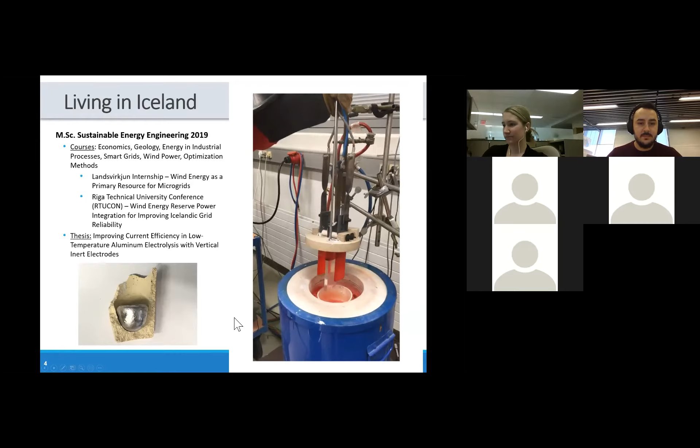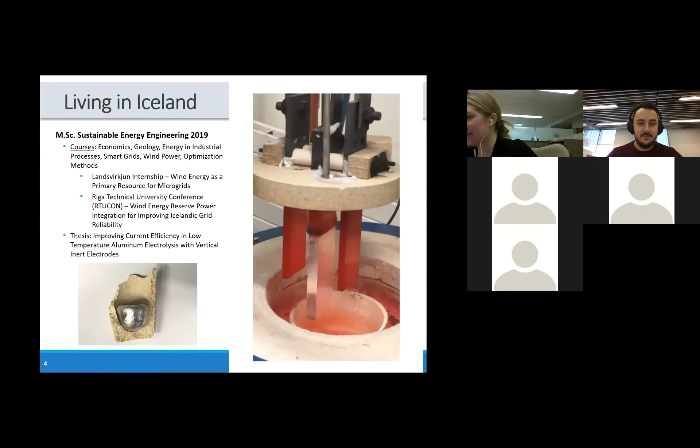So I have a video, let's see if this works and plays. One second, let me turn the laser off. The volume's not really needed. So this is just from one of our experiments after we made the aluminum, taking the anodes and cathodes out of the system. You can see there's molten aluminum on that middle one.

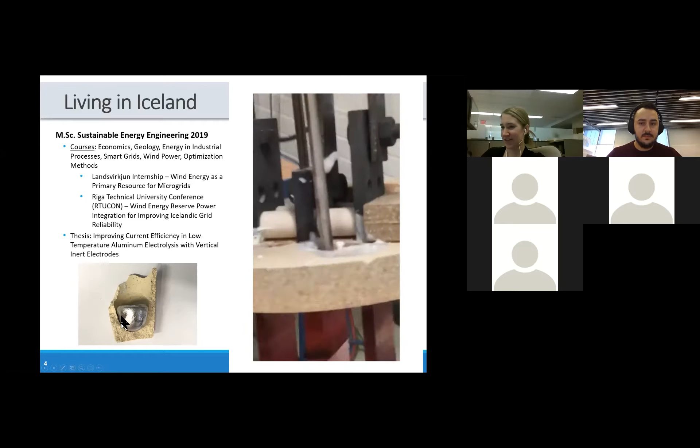And then I just also included a picture of our product. So this is a little nugget of aluminum.

So fortunately, while I was working on my thesis, I landed a job at Covanta, and it's very convenient that the corporate headquarters is about 25 minutes from where I grew up. So since the summer of 2019, I've been at Covanta.

We're a sustainable waste management company, and we provide sustainable waste and energy solutions to our clients to ensure no waste is ever wasted. So what does that mean? There's always some value within a product at the end of its lifetime, so we want to make sure that it's utilized to its fullest potential. We have helped clients minimize their environmental footprint and maximize their value. Our clients range from residential areas, commercial, working with different companies, as well as federally, working with the government, to help them reach their sustainability goals.

So our core business is our waste to energy facilities. We also use the term energy from waste, so I might use them interchangeably throughout the presentation. We have a subsidiary business called Covanta Environmental Solutions.

Is there anything? Oh, sorry, Lori. No, my camera's okay. Surprisingly, the light hasn't gone out yet.

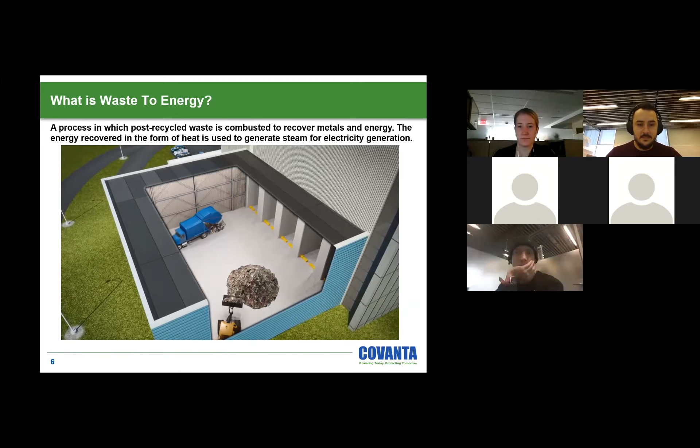The waste is unloaded onto the tipping floor and visually inspected for any unacceptable items, which are removed for separate recycling or proper disposal. Waste is then pushed into a storage pit and thoroughly mixed before being loaded into bins, which we call hoppers, where it travels to the combustion chamber. The tipping and waste storage areas are maintained under negative air pressure to contain dust and odors.

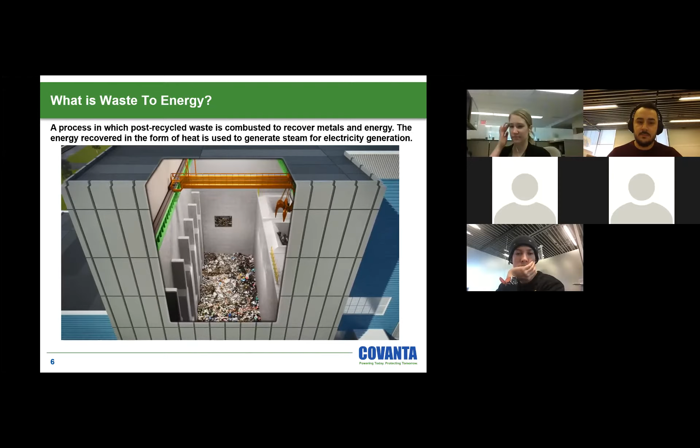Once fed into the combustion chamber, waste is combusted at extremely high temperatures in a self-sustaining process at approximately 2,000 degrees Fahrenheit. A typical hopper load is completely combusted in 1 to 2 hours.

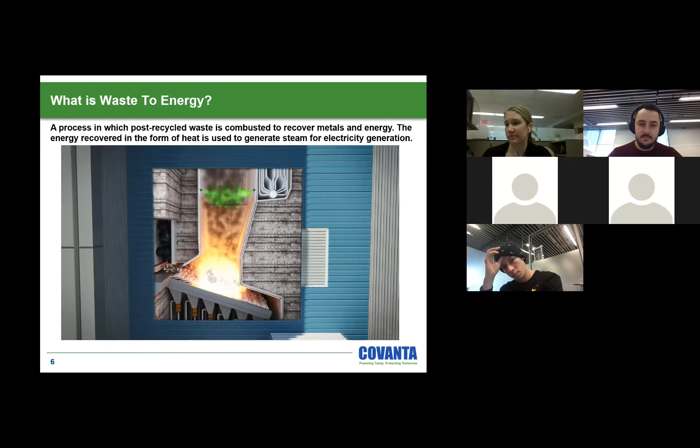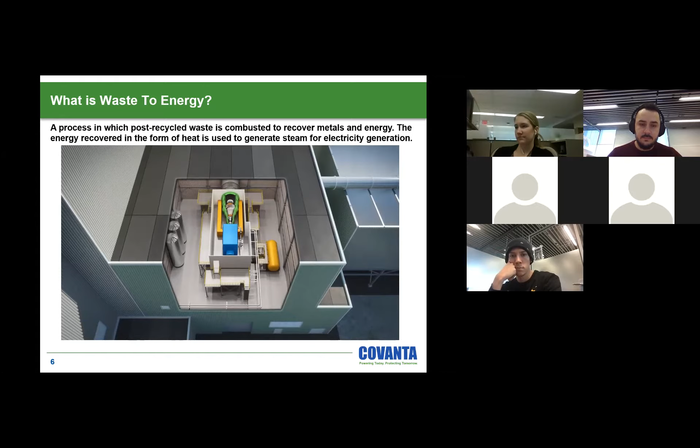As waste is burned, the heat converts water in the steel tube-lined walls into steam that rises through boiler tubes where it is superheated. The steam turns a turbine-driven generator to produce electricity, or may sometimes be used directly for heating or industrial processes. The electricity produced by the turbine generator is exported to local utilities for use in homes and businesses.

Each ton of waste can generate 550 to 700 kilowatt hours of electricity. Steam from the process is condensed back into water and returned to the boiler tubes, making it an efficient, closed-loop system. After combustion, the volume of waste is reduced by 90%, leaving an inert ash and metal.

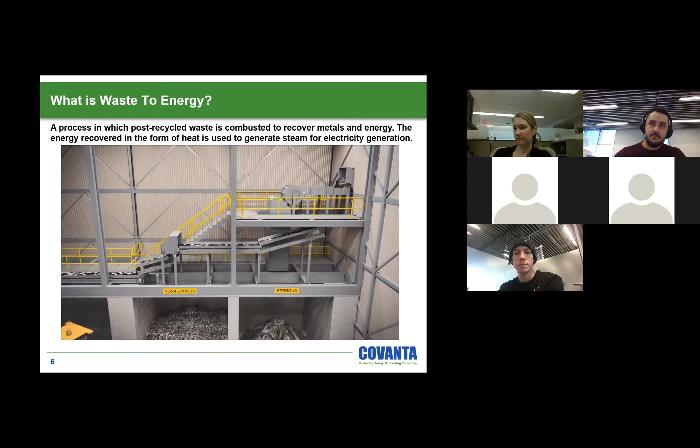Remaining ash is beneficially reused or landfilled as non-hazardous waste. Ferrous metals such as iron and steel are recovered using a rotating drum magnet, and non-ferrous metals like aluminum and copper are separated by an eddy current system. Collected metal is sold to be made into new products.

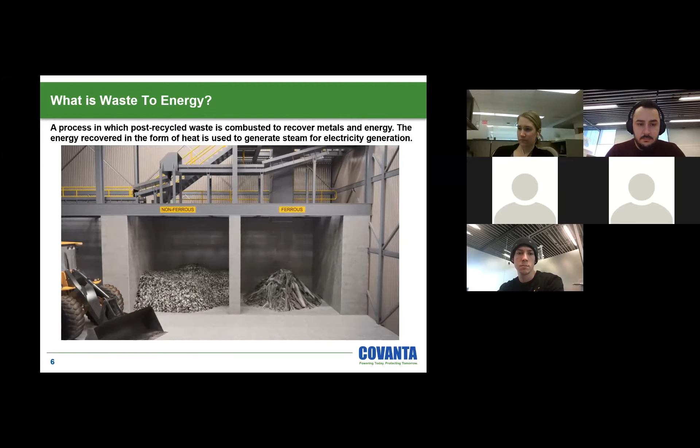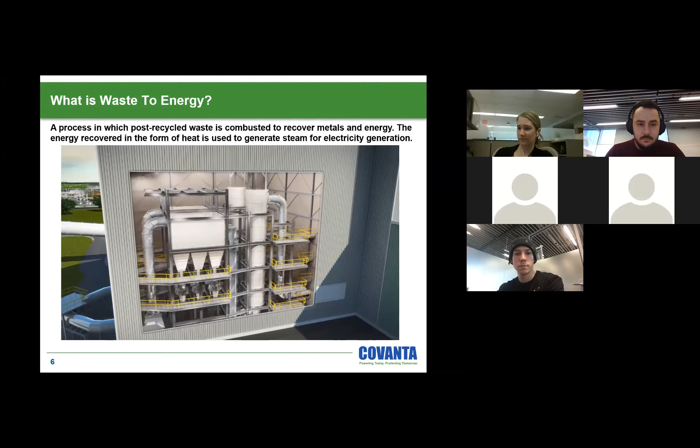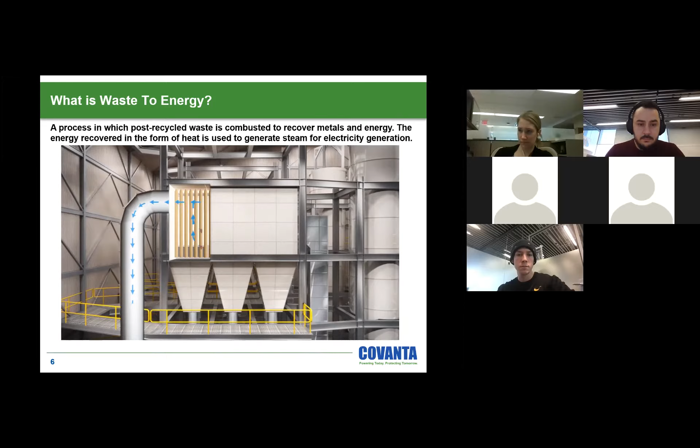State-of-the-art air pollution control equipment ensures that emissions are well below limits to be fully protective of human health and the environment. We neutralize acid gases using lime in a scrubber reactor and inject activated carbon for heavy metal control. We control emissions of particulate matter primarily through a bag house, which employs thousands of fabric filter bags. All flue gas must pass through the bags before exiting through the stack.

Throughout this process, the control room closely monitors emissions through a real-time continuous emission monitoring system, controls steam flow, and a number of other automated systems inside the facility.

Covanta is committed to providing sustainable waste and energy solutions to ensure no waste is ever wasted. At Covanta, we believe the materials discarded every day should be utilized to their fullest potential to preserve the world's valuable resources and generate clean energy for our communities and the world we live in. This is how Covanta is powering today and protecting tomorrow.

All right, so that's it. That's the end of the presentation. No, I'm just kidding. But the video was a little bit long, but I thought it was a very good overview of what we do at Covanta.

So now you may be thinking, where does energy recovery fit in waste management? Both the US EPA and the EU have a designated waste hierarchy which displays materials management, placed in order of descending environmental impact. Preventing waste, not even creating it in the first place, has the smallest impact on our environment. This is followed by reducing, reusing, recycling, and composting.

Energy recovery is then the next most preferable option after recycling, with the largest impacts on the environment from landfilling. I wanted to stress that in order to get the maximum greenhouse gas benefit and reduce our impact on the environment, waste should be managed according to this hierarchy from top to bottom.

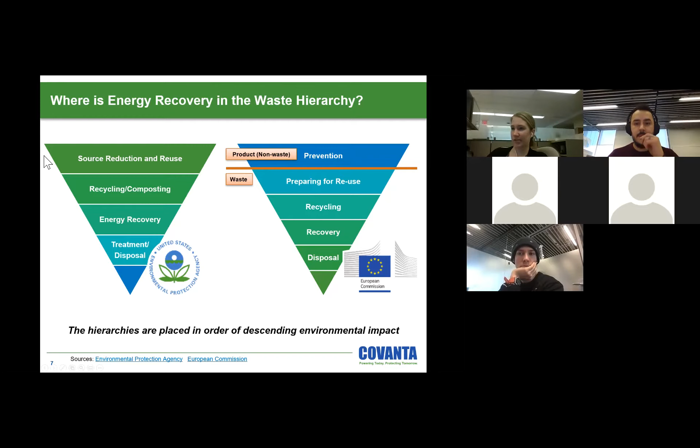So now that we know the best ways to manage our waste, how do different countries throughout the world compare? As you can see, the US is not doing a very good job at waste management, where we landfill nearly two-thirds of our waste. We're recycling about 30%, and energy from waste is about 7%. This is quite different from Europe, where they've enacted sustainable waste management policies, rules, and regulations for how to manage their waste.

You can see on the screen that Denmark and Germany are leading Europe, with Denmark's nearly 50% and Germany's over 50% recycling, and then the next is energy from waste. There's very little landfilling - instead they use energy recovery to extract value out of materials they can't recycle rather than landfilling.

I also wanted to include Canada, because Canada is very similar to the US, where there's a lot of land. You can see there's a similar breakdown with over two-thirds landfilling.

I also included Iceland, since obviously Reykjavik University is in Iceland and we've all lived there. You might be surprised to see it has a similar ratio, with almost two-thirds landfilling as well. It's interesting to note that 4% of the trash utilizes energy from waste, and this is because in 2019, Iceland started sending their trash to the Netherlands.

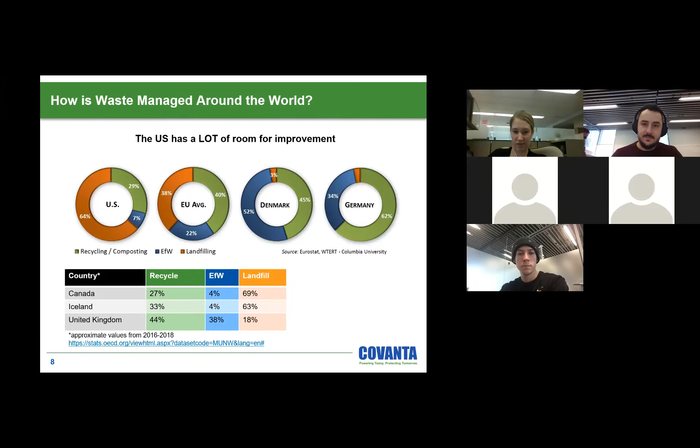We all know that reducing, reusing, and recycling helps minimize our environmental impact. But you might be asking, why waste to energy? Why utilize this compared to landfilling? Why is it better environmentally? First, using energy from waste instead of landfilling eliminates the production of methane, and methane is 84 times more potent than CO2 over a 20-year period. This is obviously particularly important given the current global push for combating climate change in a timely manner.

Also, there is leachate generated from the trash in the landfill - heavy metals can go through the water and get into the groundwater and contaminate it. It's not a very sustainable use of land, as it requires a lot of land. Energy generation from landfills is about 65 kilowatt hours per ton of waste.

So energy from waste facilities are able to recover much more energy than landfills, even those equipped with gas collection and energy recovery systems - about 9 times as much energy per ton of waste on average. And just a statistic: US landfills only capture about 50 to 70% of the landfill gas generated, so there's still a lot of methane being emitted into the air.

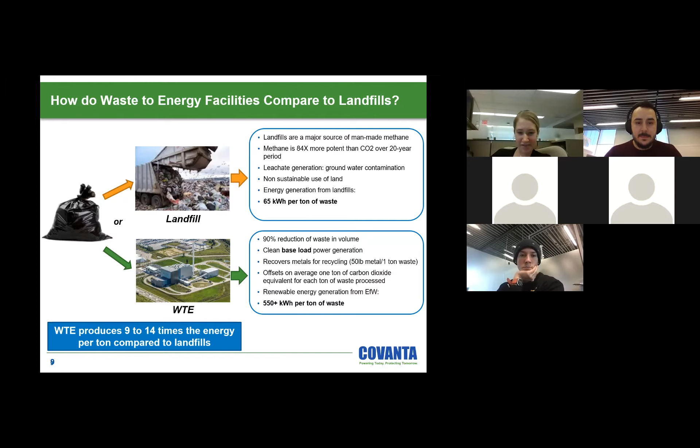Another benefit is that it's actually net negative in greenhouse gas emissions when looking at the ton of CO2 equivalent per ton of MSW diverted from the landfill. So by using energy from waste, we're saving a ton of CO2 equivalents from a life cycle approach.

So how is this possible? To recover energy, we have to combust the waste, and the combustion process emits CO2. However, we're reducing greenhouse gas emissions by avoiding the alternative of landfill and the methane it produces, as well as by providing baseload power that could have otherwise been generated from fossil fuels.

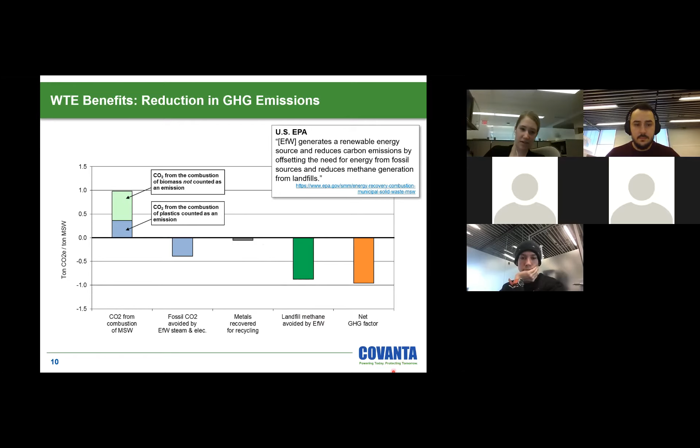Combining the two blue shaded bars cancels them out, and then the metals combine with the methane avoided by energy from waste, giving a net greenhouse gas savings of about a ton of CO2 per ton of MSW combusted.

So energy from waste is actually the only major source of electrical generation that is net carbon negative. In this chart, you can see the life cycle greenhouse gas emissions on the left-hand side in tons of CO2 equivalents per megawatt hour generated. Coal and natural gas are quite high, but energy from waste has a negative net carbon impact.

This is because it both manages waste and at the same time generates electricity while preventing methane emissions from landfills. Meanwhile, most of wind and solar's life cycle greenhouse gas emissions are due to upstream processes, for example mining the rare earth metals required to create solar panels.

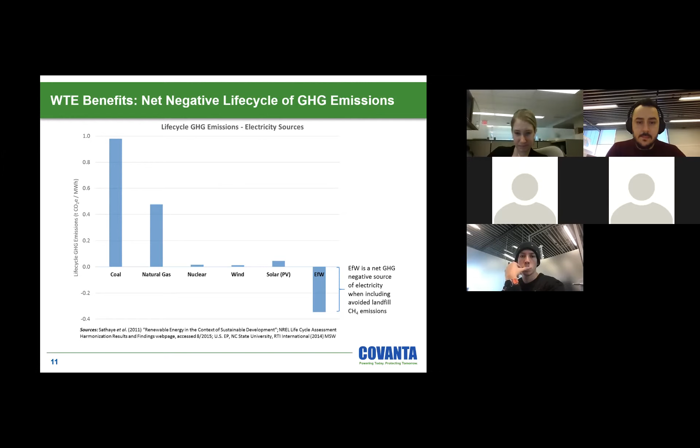Lastly, energy from waste can be beneficial in that it utilizes less land. On average, energy from waste facilities need less than an acre per megawatt, in contrast to landfills which are about 27 acres per megawatt, solar which requires 8, and wind which requires 18.

I know most of you are not in the US, so you're probably thinking, what the heck's an acre? So I also put it in meters squared and kilometers squared. For reference, Klambratun is about 30 acres, which is about the size of a landfill, and a football field is about 1.76 acres - so less than half a football field is required for land use for energy from waste facilities.

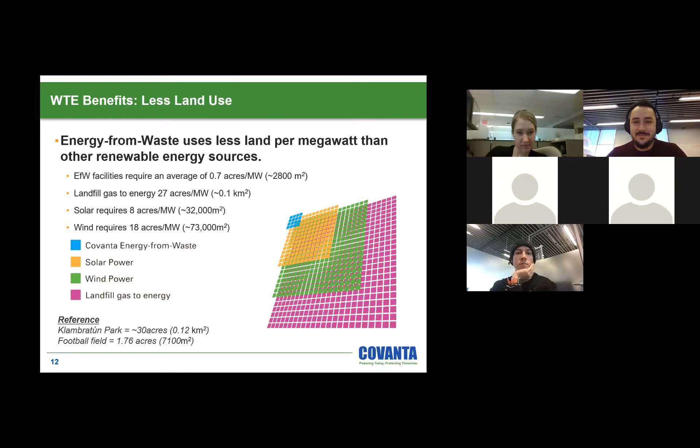So now we've got an introduction to waste energy, and now I'm gonna talk to you about Covanta. Covanta is a world leader in waste to energy, operating over 40 facilities in North America and Europe. We make up about 70% of the US market, and annually we process about 21 million tons of waste.

The waste is processed generating 10 million megawatt hours, which is enough to power over 1 million homes. Through our metals recovery, we recycle over 600,000 tons of metal, and that's equivalent to about 6 Golden Gate bridges.

We provide employment to nearly 4,000 people in North America, and we have our high focus on sustainability and encouraging a circular economy.

We have a subsidiary business called Covanta Environmental Solutions, and it helps more than 3,500 customers across North America identify opportunities to minimize their waste and find beneficial reuse for their materials that would otherwise be thrown away.

For example, in the bullets you can see we help with total waste and materials management. We help with liquid waste management. For example, we can treat wastewater to be beneficially reused.

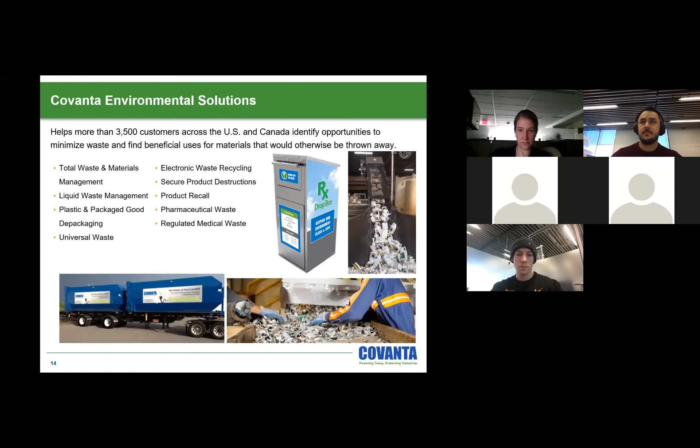I just wanted to give you an overview of our Covanta facilities in North America. You can see that we're concentrated a lot in the Northeast, and this is attractive because densely populated areas have limited access to alternative disposal like landfilling in more metropolitan areas. So they have to weigh the cost advantage versus long hauling the trash to landfills.

So you see even like in Europe, since there's less land, it's more densely populated, that energy from waste facilities are advantageous because the trash isn't being transported that far and the energy is being recovered for electricity generation and metals recycling.

So this is our North America map. And then we have also started working in the United Kingdom, as well as we have a facility in Ireland. So the UK is committing to more sustainable waste management by diverting their trash from landfills to energy recovery and recycling. We're proud to be partnering with them as they go through this transition.

So I just wanted to point out, Dublin is already operational. They can take in 600,000 metric tons per year and produce up to 60 megawatts. And then I also pointed out our Rookery facility because in my role, I'm working with them as they're onboarding and getting their pre-compliance for pre-commissioning.

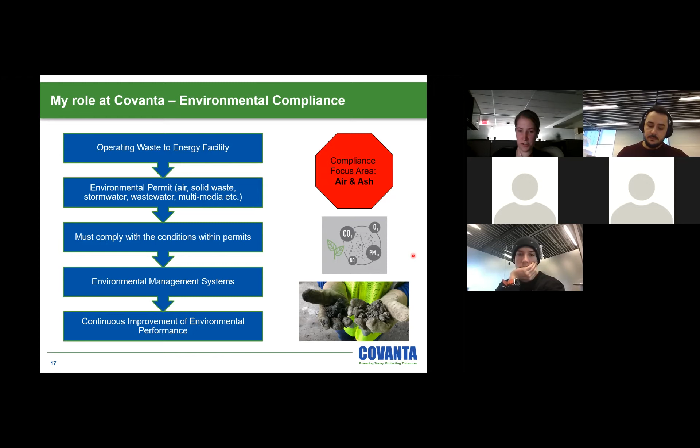So our main compliance focus areas are on air and ash, and I'll be going through that on the next few slides. In terms of air compliance, we have a bunch of control technologies in place. First, we have a sophisticated boiler design that ensures complete combustion of the waste, taking into consideration time, temperature, and turbulence. We maximize our combustion in order to minimize, for example, incomplete combustion where carbon monoxide is generated.

We also utilize selective non-catalytic reduction systems, or SNCR, for NOx control, injecting ammonia or urea into the furnace to convert the NOx into harmless nitrogen gas. We have activated carbon injection systems, which are added to the flue gas to allow, for example, mercury and dioxins to adsorb to the surface, and then they're removed downstream in our baghouse.

We also have our scrubbers that neutralize any acid gases through a spray lime slurry system. The acid gas reacts with the lime to form salts, which dry and leave a salt residue that's removed downstream through our baghouse. After treatment, the gas goes through this baghouse, which acts like a vacuum cleaner with a filter bag that traps particulate matter and the lime and fly ash on the bag surface. These bags are periodically cleaned to remove the ash and metals at the bottom of the baghouse.

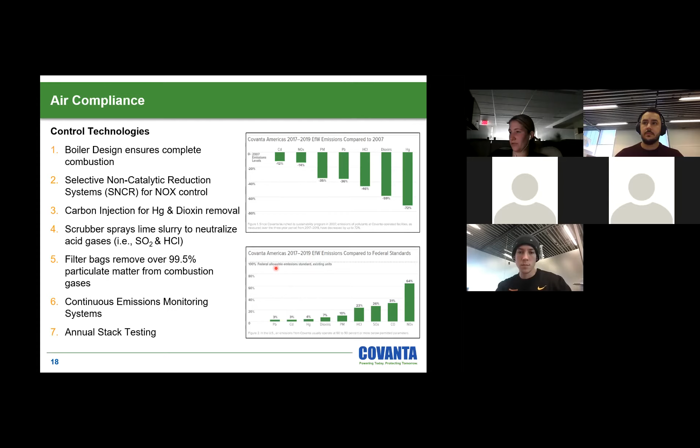I just wanted to show you real quickly, we started a sustainability program, I believe, in 2007, and since then you can see a reduction in our emissions. This is comparing 2017 to 2019 compared to 2007. We've had a decent reduction in the different pollutants, as well as, this bottom chart shows our emissions comparatively to the federal allowable standards.

We also look for compliance in the ash generated from our facilities. Waste energy facilities generate ash residue as a byproduct when they combust the waste. Any non-combustible material in the waste, and a small portion of the carbon and lime from the air pollution control, form our ash. The bottom ash comes from the bottom of the boiler, from the grate, after the trash is combusted, and what we call fly ash is taken when the baghouse bags are cleaned off. It's about 85% bottom ash and 15% fly ash.

In Europe, they keep bottom ash and fly ash separate, whereas in the US we combine bottom ash and fly ash to call it combined ash. We have to actually characterize our ash on given frequencies. They vary across the state, but basically what we have to do is test our ash and ensure that it's non-hazardous through a different testing procedure.

So we have to simulate landfill leaching. I like to compare it to coffee - when you heat up the water, it trickles through the coffee grinds, and then you get your coffee. In this testing, we simulate what it would be like for 100 years at a landfill with our ash in it. So we have to verify that our ash is non-hazardous. We have about, I believe, 30 years of data showing this.

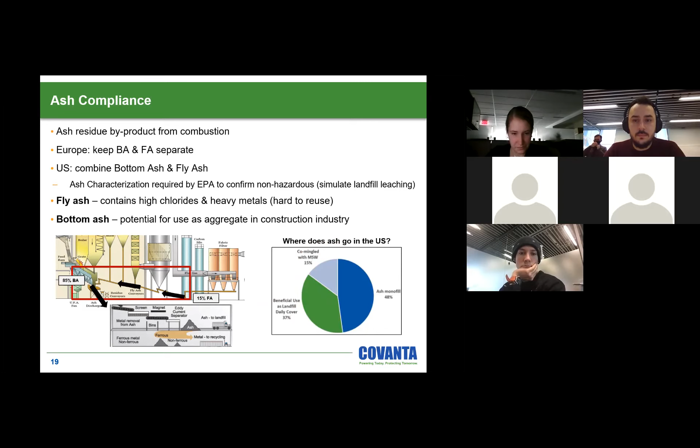I also wanted to bring up our metals management - we are currently doing a total ash processing system. This falls in conjunction with the reuse of the bottom ash. This metal management facility is in Pennsylvania. Energy from waste facilities send their ash to this system where it can be broken down into its component parts, so you can utilize aggregate for asphalt, for concrete. It further cleans the ferrous and non-ferrous metal, and anything left over can be used residually in landfilling.

This process allows us to recover small metal fractions. We're even recovering some rare earth metals, which is really cool. It can also reduce the disposal of ash in landfills by up to 65%. Before I stated that taking the trash and combusting it reduces it 90% by volume. By putting it through this total ash processing system, it can even reduce by up to 65% from that 90% reduction.

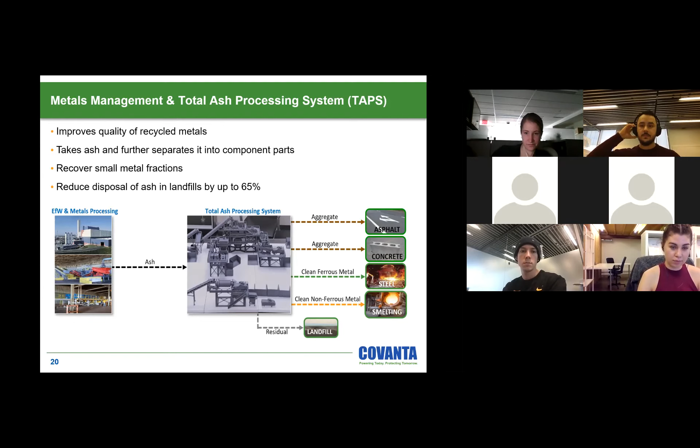I wanted to end the presentation with highlighting other areas like community engagement. We strive to make a positive impact on the communities that we operate in. We have a bunch of community-based programs for each individual facility - they have their own program set up. It's showing that we aren't just a business, but we want to make a positive contribution to the areas that we operate in. Nearly 50% of our employees live within 10 miles of the facilities they're employed in, so these are our backyards too, and we want to take care of our neighbors.

We do a bunch of different things like facility tours, community cleanups, toy drives for Christmas. We help out with the food pantry and soup kitchen. We take marine debris out of the ocean - we work with a company called Fishing for Energy, so we help clean up and then bring that debris to our waste energy facilities. We also have green education, STEM, retiring American flags properly, and other volunteering service. We have Habitat for Humanity too. We're really focusing in on operating in these communities, and we want to have a positive impact and play a positive role where we operate.

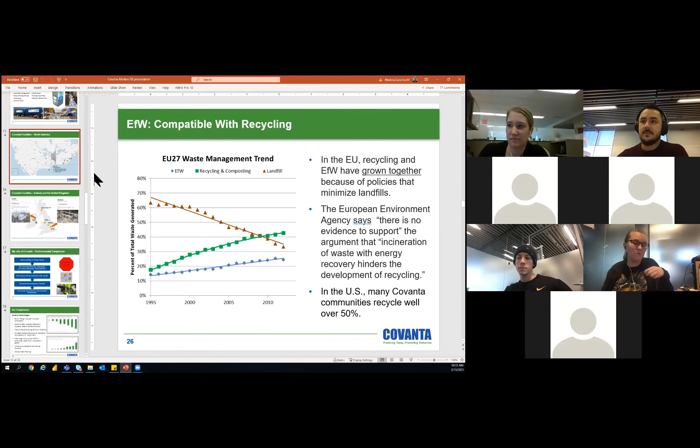Your question in regard to other issues related to, sorry, can you say that again, Tenley? Yeah, I was just wondering if there's any other social issues. I guess you kind of answered my question, but any pushback in your area? Because college students were basically the only ones that kind of cared about recycling in the area. From when we were talking with the plant, they were the only ones really pushing for more recycling. There was huge pushback on why it was there, but they were so proud of it.

Well, there has been pushback in the past against energy from waste facilities, especially in the US. A lot of our facilities, unfortunately, are located in lower income neighborhoods, just because they're more densely populated. So that's why we really hone in on having our community outreach and being a good neighbor, and just educating people about energy from waste now, because I believe there was an amendment to the Clean Air Act in 1990 which really pushed for this. Let me go to another backup slide.

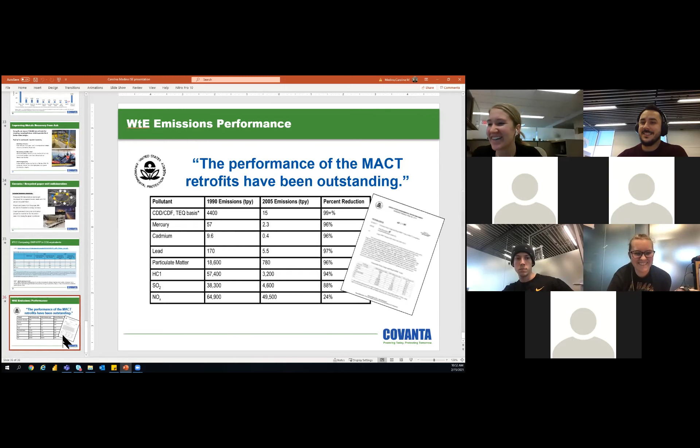So it's MACT, maximum achievable control technology. This had been implemented starting in the 90s, and you can see that by 2005 the percent reduction had significantly increased across all these different pollutants. So as regulations came into play, waste energy facilities had to improve their air pollution control and their technologies. It went complementary with it.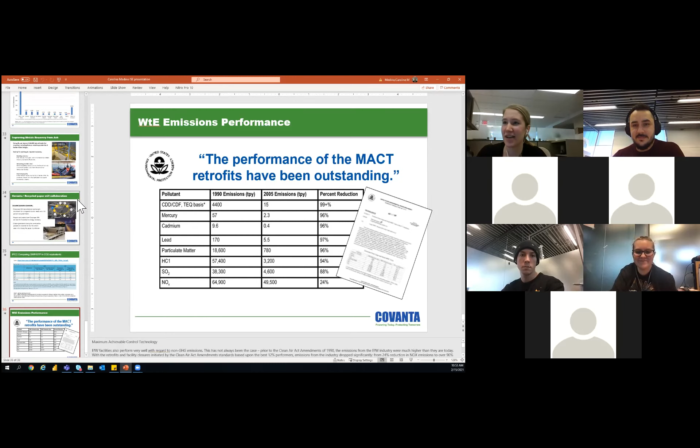I think a lot of people also have pushback because they're thinking of what we like to call your grandfather's incinerator — back in the day, trash just used to be burned to get rid of the waste. So I really think it's just about educating the community and participating in it through different volunteering programs, bringing people into the facilities to see how the technology works, just being very involved. Unfortunately, this last year we haven't really been able to have facility tours, but we've still done some community engagement, like you can see on the slides. Some of the photos show masks, for volunteering and toy drives. Like I said before, it's about being a well-rounded business — we are producing energy and reducing waste, but we're also being good neighbors and involved in the communities. So that's kind of how we try to help with pushback from communities, just through education and community involvement.

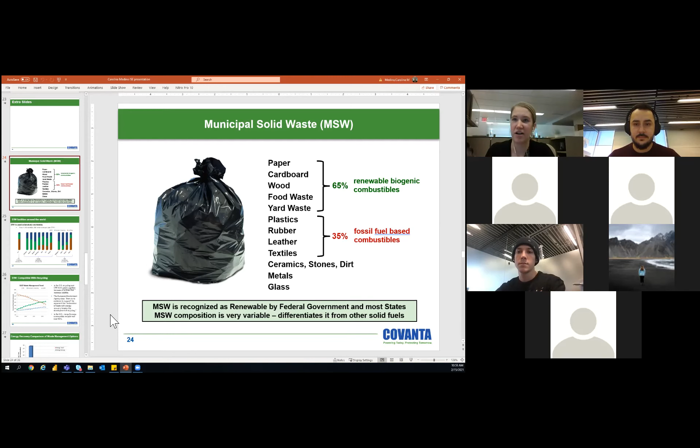We actually have—under my name there's a link to our Covanta sustainability report, with a lot of information in there. Within it, we have breakdowns of each of our plants and their emissions, different types like NOx, SO2, or particulates, in comparison to other industries in the area. We use that when talking with the community, because it's easy to blame one of our facilities with a stack, when actually a lot of pollution is coming from cars.

But sorry, going off on a tangent—we also have facilities operating in non-urban or lower income areas. For example, a bunch of residential areas near our Long Island facility; the facility was built and then the residences were built around it. I really think it's the community in the more urban areas that gives the pushback, because they're exposed to other sources of emissions. But it also comes down to education, because in Europe there aren't that many landfills, so a lot of people have these energy-from-waste facilities in their backyards. It's just a different mindset in the US, so that's why we have to continue education and outreach programs and tell them what we actually do rather than what they read.